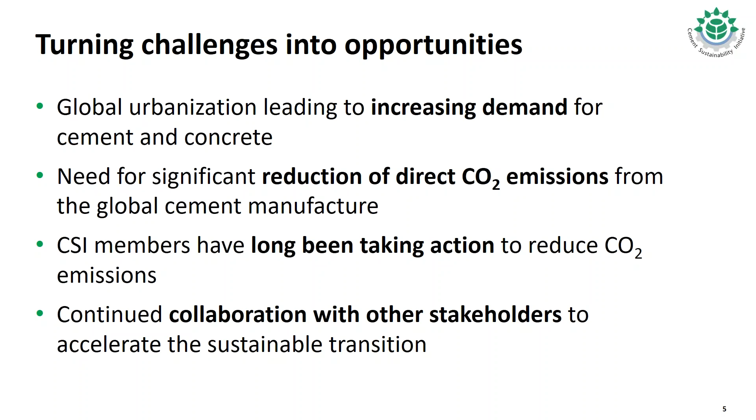I will now hand over to Cecilia from IEA, who is going to explain a little bit more the details about IEA. Cecilia? Thank you very much, Alvaro. This is Cecilia from the IEA, and on behalf of the agency, I'd like to welcome everyone to this launch webinar for the Cement Technology Roadmap. The IEA is an autonomous organization that works to ensure reliable, affordable, and clean energy for its 30 member countries.

The IEA's first mission was to promote energy security for its member countries, and it was founded after the 1973 oil crisis to help countries coordinate a collective response to major disruptions in oil supply. While energy security continues to be the key aspect of our work, the IEA has evolved significantly since we were created, and is really now at the heart of global energy dialogue and the transition to a clean energy future, thanks to its authoritative statistics, analysis, and policy recommendations.

The IEA's mission today has evolved and revolves around three further core priorities, including economic development, environmental awareness, analyzing policy options to offset the impact of energy production and use on the environment, especially for tackling climate change and air pollution. And finally, on engagement worldwide, working closely with our partner countries, especially major emerging economies, to find solutions to shared energy and environmental concerns.

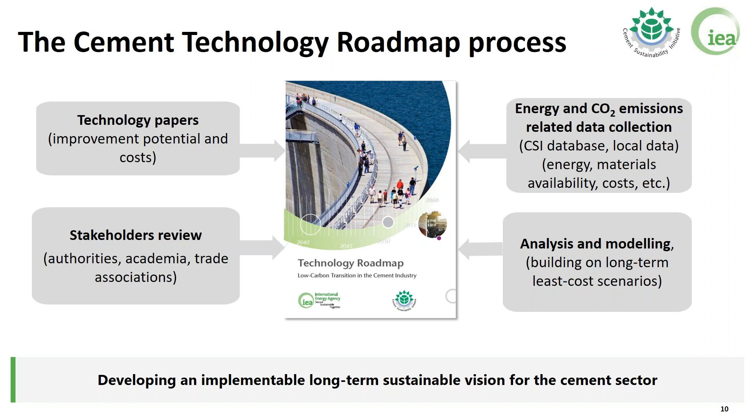In that respect, we follow a very similar approach as we did for the initial edition of the roadmap in 2009, where the European Cement Research Academy, ECRA, was commissioned by CSI to develop a set of technology papers that are publicly available, exploring different technology opportunities to again improve the energy performance and CO2 emission footprint of cement production.

In 2009, 33 individual technology papers were produced, and for this edition, 52 technology papers were developed, and those were published in March 2017, last year. As I've mentioned, those are available on the website. You see the link here, so they are ready for download. There was, as you can see, an expansion of the spectrum of technologies that were looked at.

Some of the main additions and expansions compared to the last edition were, for instance, the refinement of papers discussing waste heat recovery technologies, also papers discussing pretreatment of fuels, especially alternative fuels, but also energy efficiency and energy management, optimized grinding technologies, and also alternative cement constituents on top of alternative binding materials that are widely discussed in the roadmap as well.

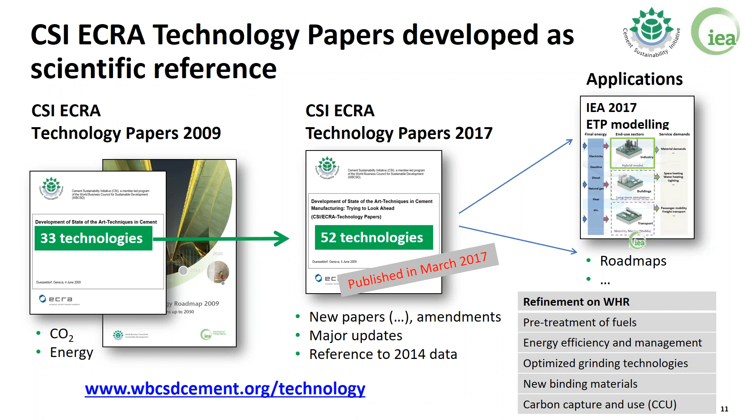And also beyond carbon capture technologies, the angle of carbon capture and use was discussed and analyzed through these technology papers as well, and then that information was fed into the roadmap analysis.

So setting more the context for the cement industry today, just as a starting point, we wanted to run you through a few statistics related to the cement industry globally as of 2014. The first chart that you see here is in terms of energy consumption. So the cement industry is the third industrial energy user globally, following iron and steel, and chemicals and petrochemicals, and it's also the second industrial user of coal as well. So you can see that the sector relies on fossil fuels quite importantly today.

In terms of CO2 emissions, more specifically direct CO2 emissions, there is a specific characteristic of the cement production process where we have to distinguish between energy-related CO2 emissions and process CO2 emissions that are basically released throughout the chemical reactions from limestone to clinker in cement kilns. And you can see in this screen that process CO2 emissions represent about 2/3 of the total direct CO2 emissions of the sector. And this is one of the challenges that is also analyzed in the roadmap, how we can overcome that characteristic.

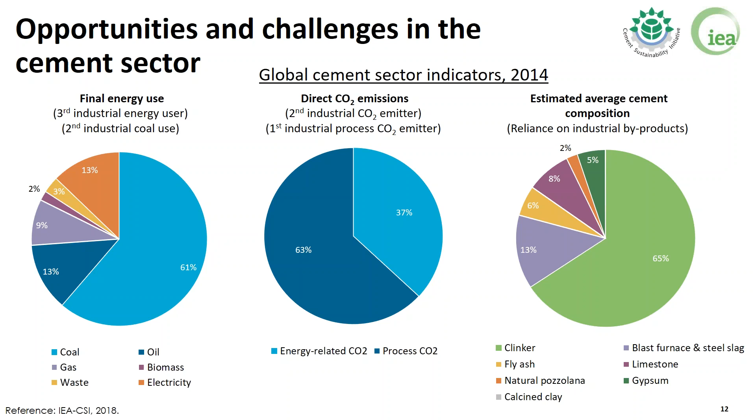So the exploration of these alternative constituents has been basically identifying some industrial byproducts, such as fly ash from coal power plants or blast furnace slag from iron and steel production, that are contributing to blended cements to reduce the clinker to cement ratio. You can see here in the light purple and yellow those contributions, and this is another challenge that is explored in the technology roadmap, since some of these industrial byproducts are expected to be more limited in the long term in a 2 degrees context, where those activities would be moving away from coal power generation or from the widely established blast furnace route for iron and steel production, as an effort to also contribute to reduce the CO2 emissions that they are currently generating.

So with that setup of the current situation, we started by exploring what the forward-looking cement demand would be. And here you can see the two variants that we've explored from the base year to 2050 in terms of cement production. We've explored a low variability and a high variability case to try to cope with the uncertainty of projecting cement demand in the future.

But what we could see is that rising population, but also increasing urbanization patterns, are driving upwards the demand of cement to deliver infrastructure development and build infrastructures that would be providing this well-being in society, especially in growing countries.

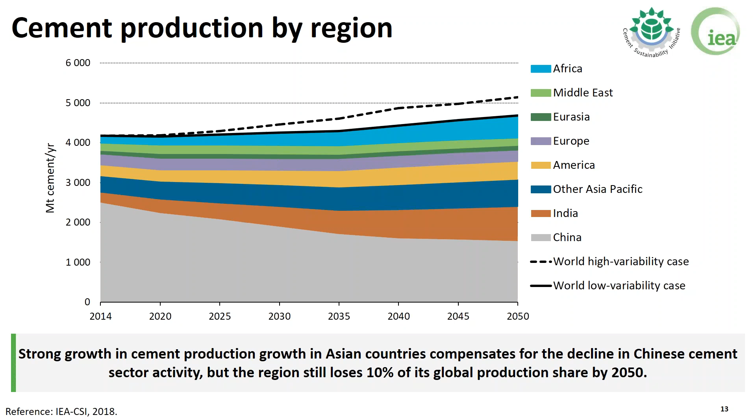What you can see in the depicted regional breakdown for the low variability case is that even if we are expecting a slowdown in the activity of the cement sector in China in the long term, as you see in gray at the bottom, the whole Asia region keeps a quite similar overall level of cement production over time, because the slowdown in China is compensated with the stronger growth in India and other Asia Pacific countries; India is the main contributor. But you can also see other important growing regions such as Africa and especially Latin America.

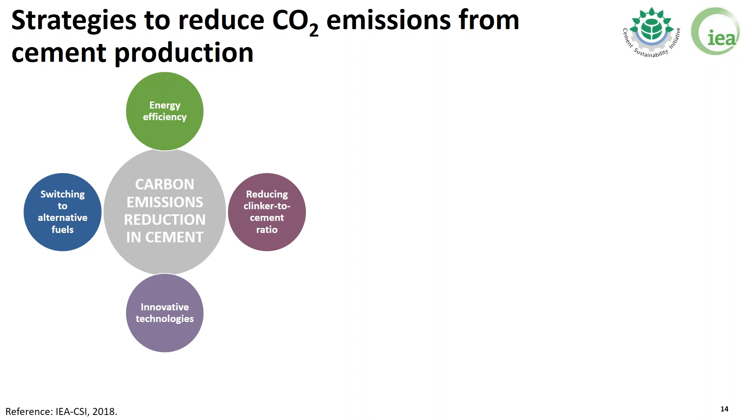So with that context, we've explored what possible strategies could contribute to reduce the CO2 emission footprint of cement manufacturing, and we have grouped those into 4 categories: energy efficiency, switching to alternative fuels that would be less CO2 intensive, reducing clinker to cement ratio, and innovative technologies, including, for instance, carbon capture and storage. And of course all those strategies cannot be analyzed independently. They have interactions among themselves.

For instance, a higher uptake of alternative fuels would have an upward effect on the energy footprint of cement production in the cement kiln, because typically these fuels have a lower calorific content. So those types of interactions are also explored in the roadmap.

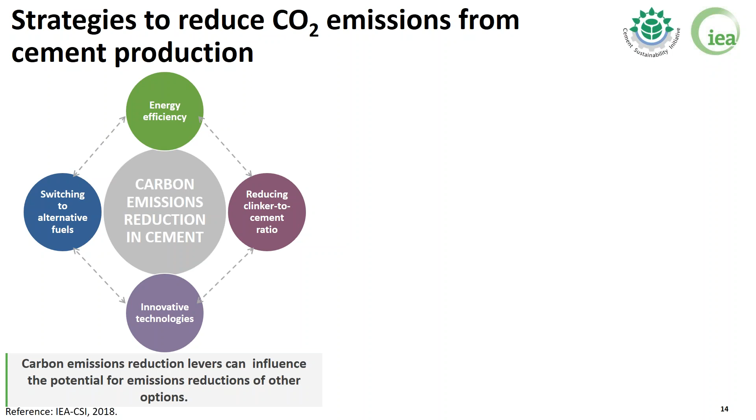Cumulatively, the reduction of emissions between these 2 scenarios globally represents almost 8 gigatons of CO2, which is equivalent to almost 90% of today's direct global industrial CO2 emissions. So it's quite a significant transition that we are exploring here.

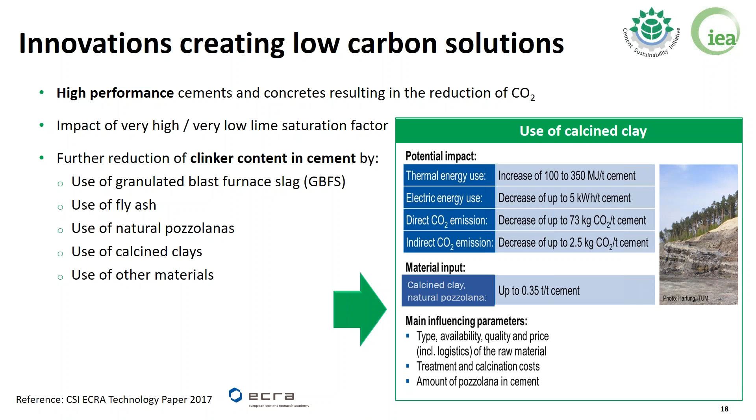So, one other element related with composition of cement that you will find in the roadmap is a very specific spotlight on alternative binding materials. They indeed offer opportunities for process CO2 emission reduction by using mixes of raw materials and alternatives compared to Portland cement.

However, their commercial availability and applicability differs widely, and there is currently no independent publicly available or robust life cycle assessment for comparative quantification of production costs. For this reason, we consider it premature to include them in our technology roadmap in terms of real contribution to the CO2 reduction on the long term.

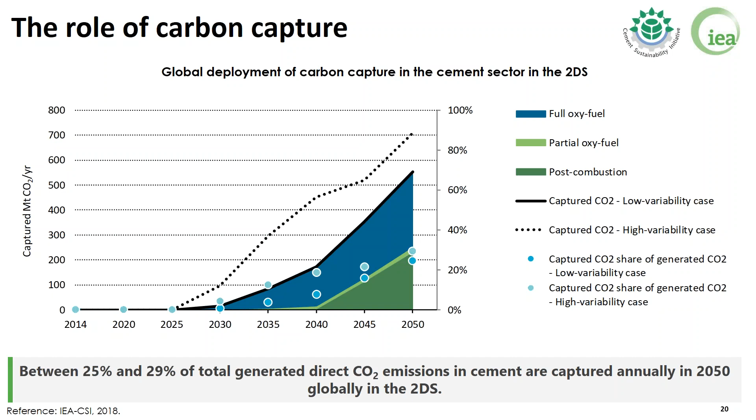Next slide is about, again, the technology papers. Indeed, the technology papers go into detail about which are the different technologies that can be used for carbon capture. And for example, they zoom into oxy-fuel technology, since on oxy-fuel technology there are already some pilot projects now operating. The potential impact of oxy-fuel technology in terms of electric energy use will be an increase of electricity consumption. This is mainly due to the production of oxygen and to the purification of the CO2.

But on the other side, due to the fact that oxy-fuel can even capture 100% of CO2 emitted, in terms of direct CO2 emission, there is a decrease up to 835 kilograms of CO2 per ton of clinker, so the overall CO2 emitted from clinker production. And because of electricity usage, there is a slight increase in terms of CO2 emissions. The quantity of oxygen that is needed from the air separation unit is between 0.25 and 0.3 ton per ton of clinker.

Of course, the impacts in terms of CO2, energy and cost depend on the level of achievable CO2 concentration, the level of retrofitting that can be applied to existing kilns in terms, for example, of air leaks in the kiln, and the energy use of the kiln system itself. In terms of cost, the investment expected to retrofit one plant to apply oxy-fuel technology is between 105 and 130 million euros. There is also an increase in operational costs, and overall, at the current level of technology available, the cost per ton of CO2 avoided is expected to be around 45 euro per ton.

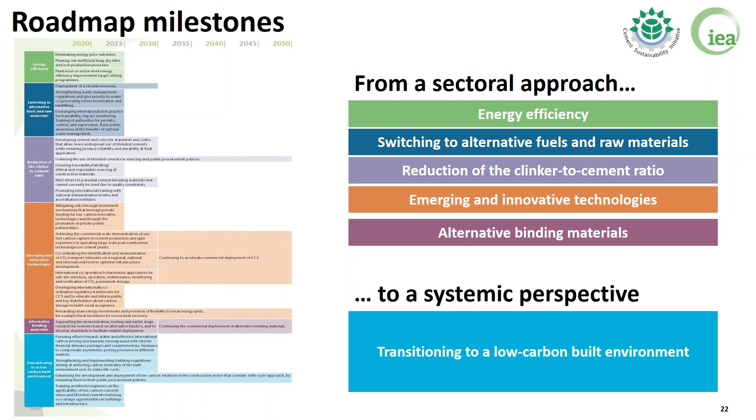Very good. Very good. Thank you, Manuela. Thank you, Araceli.

So, as you saw during the presentation, in order to achieve this 2-degree scenario, we must recognize that a huge level of investments will be needed, as we are going to see. So, to implement this vision, we need to accelerate development and deployment of CO2 emissions reduction levers, as well as supportive policy, public-private collaboration, financing mechanisms, and social acceptance. So it's a very long value chain that is going to be involved in this solution. Therefore, we cannot do it alone. That's a key statement, and acceleration is needed.

So we need to establish several actions. You can see some options here. So I'm going to give you some examples. So creating a carbon pricing mechanism with a stimulus package. We know that this is going to be very important. We have in some countries emission trading systems, in other countries we have carbon taxation. So carbon pricing mechanisms are going to be important, plus some stimulus packages to implement these technologies. Also to implement additional technologies to reduce the clinker cement ratio, as we said before, alternative fuels and energy efficiency, but also developing innovative low carbon technologies, including carbon capture, storage, and utilization.

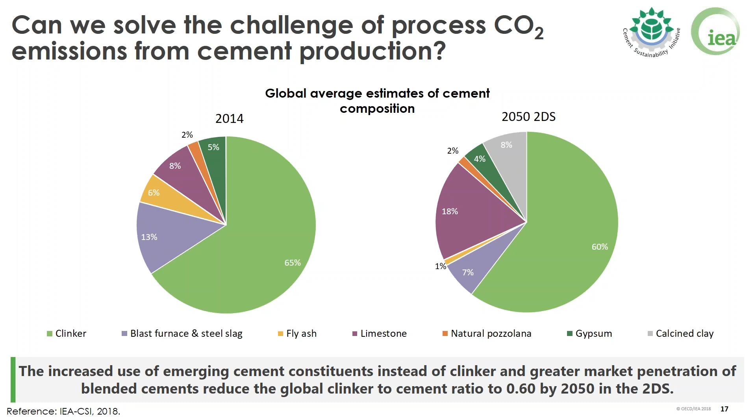The next question from Dimitri: what is the commercial constraint for Belite clinker becoming available? Okay, the current deployment of Belite cement is today limited and confined to a small number of countries due to the specific property of the material, that is a much lower early strength characteristic. And it is used indeed in massive concrete dams, and it's been used for over 15 years in China. So indeed, it's already been applied, but for specific kinds of application.

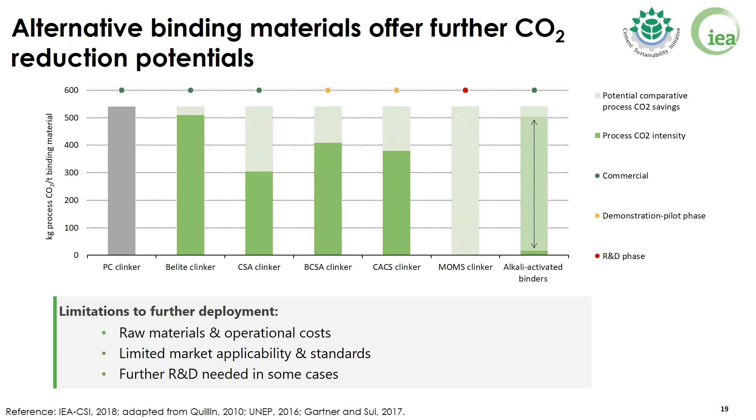Okay, so then we have two questions which are more financial related, and I will probably address them to Alvaro unless someone else wants to intervene as well. The first one, still from Dimitri: is there any projection for the capex of oxy-fuel to go down until 2040? So maybe Alvaro or Manuela. Yeah, thank you, Philippe. Maybe Manuela can complement me.

So I would say that, as with every new technology, the initial costs are higher because there's a lot of R&D and a lot of equipment that is not commercialized normally. So there is a huge R&D investment cost that justifies the fact that we are estimating between 105 and 130 million euros of investment for one single unit. So we expect for sure that this cost is going to go down over the years, but the point is we have no projection of how much it could go down, because right now, as Manuela said, there are very few pilot plants or pilot trials being done. So we cannot estimate nowadays if this is going to drop by 5% or 25%.

The important thing is that the use of energy, electric energy, is very high. So there is a limitation on what could be reduced in order to reduce investment costs. Maybe Manuela, if you'd like to complement. Yeah, no, I think the same. There are a few pilot projects already at industrial scale ongoing in Europe that we are monitoring, and I think that based on the results of these pilot projects, we will have a clear view on how costs can go in the future.

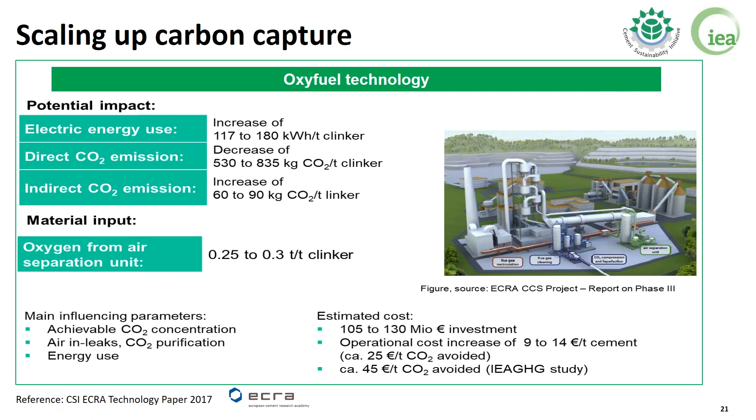Yeah, if I understand the question well, and you are referring to the projection in the roadmap, we are only considering direct emissions, so emissions that are the direct responsibility of our industry and linked to our production process. So it's direct emissions. Great.

And the other question comes from Eric Masanet, so I think I'm obliged to address it to IEA, because I guess you know Eric. The question is, it was mentioned that the lack of literature data posed a barrier to evaluating some possible decarbonization options. What would you recommend as high priority research topics for the research community to help IEA and CSI to fill the data gaps moving forward? So how can you help us? What would be the priorities to help us in filling the data gaps for moving forward?

Thanks, Philippe. Yeah, we can take that. So one of the main objectives of the roadmap is basically to identify those gaps. You'll see throughout the report there are specific sections for each of the carbon emission mitigation levers that we've described that outline different research and development goals and needs that could be needed to support the type of deployment that we are seeing in the 2-degree scenario. I could just outline a few areas.

One of the most important ones would be the area of alternative binding materials, as Manuela was describing in the presentation. Some of those families of materials are not commercially available, they are either at pilot phase or research phase. And of course, these areas would be quite important and interesting to further develop to understand what the real potential of such alternative products would be in terms of CO2 emission reductions in comparison with other strategies that we've quantified in the report.

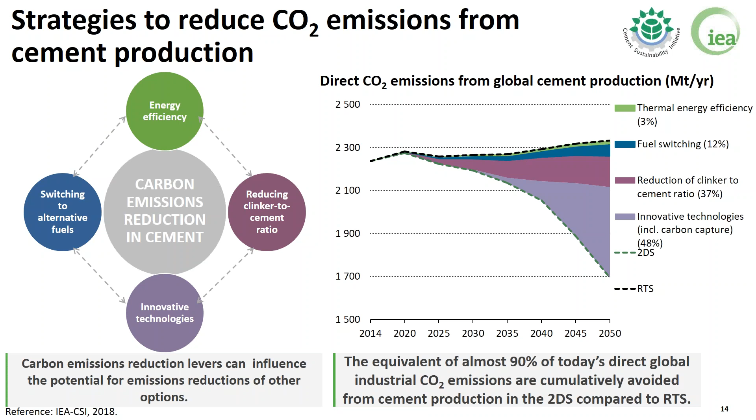As a concluding remark, as you have seen in the presentation and in the slides, CSI has been a pioneer in setting up partnerships and in establishing these types of platforms to identify what is at stake and what needs to be done to meet the challenges. We did the first roadmap, which was the first sectoral roadmap ever, in partnership with IEA and also with ECRA in 2009. And we have an update today.

It's very important to identify that, but also to identify that now is probably time for the sector to expand these partnerships towards a whole life cycle approach and throughout the whole construction value chain. So that's something that we have identified. We know what has to be done for the cement manufacturer, and we have identified it again through this roadmap.

We know what the gap is, but we also need now to look at the whole value chain. And for that, we have identified 6 types of stakeholders that we have to work together with. First of all, it's the companies of the cement sector who are not part of CSI at the moment, and which it will be important to bring on board in order to work with them in establishing these reduction solutions, but also to work with the trade and industry associations, the regional ones and the global ones, to try and identify how these technologies can be supported by the policymakers, and how we can work with them locally, nationally, and regionally to support the scaling up of these solutions.